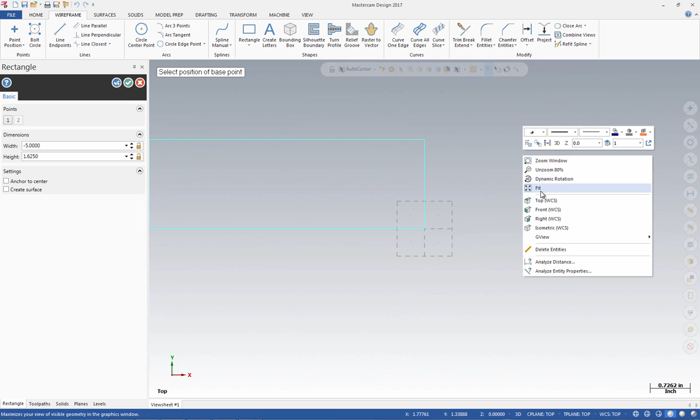Once this is done, come up to the top here and select this drop-down menu beside Auto Cursor and select the origin. Your part should snap to the origin. Also, come to the graphics interface here, right-click, and select Fit. This will fit the geometry to your screen. Once you are happy with this, select OK.

For the next step, we will be creating parallel lines. Come up to the top and select Line Parallel here. Once you have this selected, select this line off to the side and sketch it somewhere on the left-hand side.

Insert the distance 1.375 and hit Enter on your keyboard. Select this button at the top.

Again, select this entity here and sketch it to the left-hand side. Insert a distance of 0.375 and again hit Enter on your keyboard.

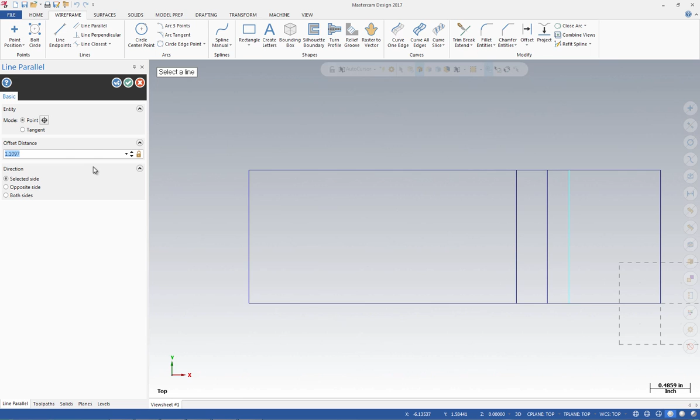Select this entity here and sketch it to the left-hand side. Enter a distance of 3.125 and hit Enter on your keyboard.

Next, select this line here and sketch it to the right. This time, enter a value of 1.25 and hit Enter on your keyboard.

Select this horizontal line down here and sketch above it. Enter a value of 0.625 and hit Enter on your keyboard again.

Select this horizontal line again and sketch north of it and enter the distance 0.875 and hit Enter on your keyboard.

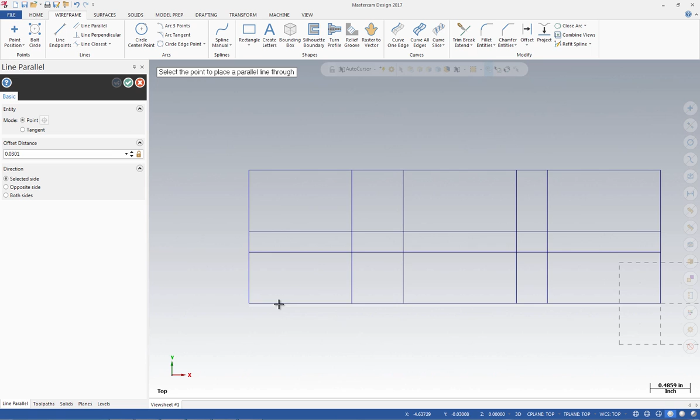Select this horizontal line one last time and select above it, and this time insert the value 1.25 and hit Enter on your keyboard. Once this is done, come up to the top and select the green button, OK.

From here, come up to Wireframe and select Line Endpoints. Select this intersection here and select this intersection here to create that line. Once this is done, come over to the green button again and select it.

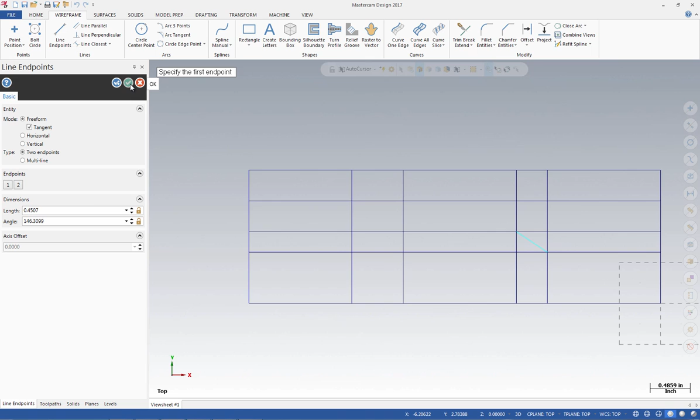Come up to the top and make sure Wireframe is selected. Under the Modify group, select Fillet Entities. The dialog box will appear on the left-hand side. If you have a radius of 0.25, that is the correct amount, just hit Enter on your keyboard.

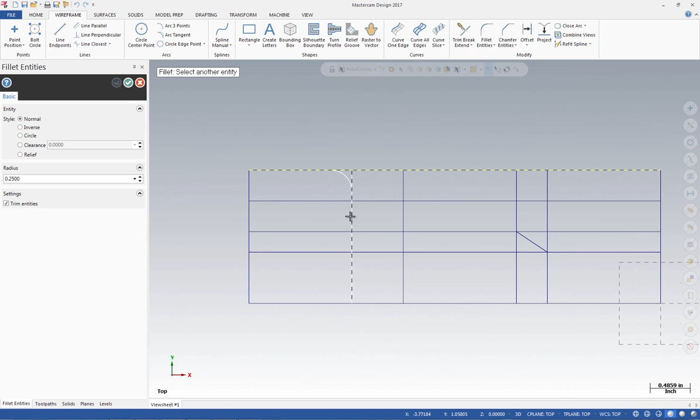Select Entity A to Entity B, following your training tutorial, Entity C to Entity D, again following your training tutorial. Hit Enter to finish.

Come over to the left-hand side, Fillet Entities, and change the radius this time to 0.0625 and hit Enter on your keyboard. Once this is done, we're going to select Entity E to F and select OK when finished. Your part should look like this.

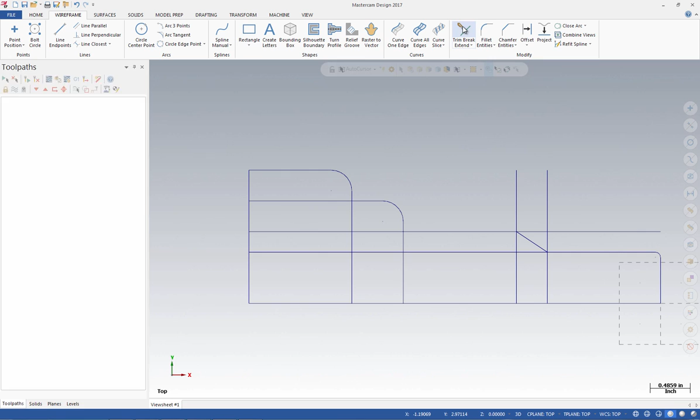Once this is done, come up to the top and make sure Wireframe is selected. Under the Modify group, select Trim Break Extend. In the Trim Break Extend dialog box on the left-hand side, select Trim Two Entities.

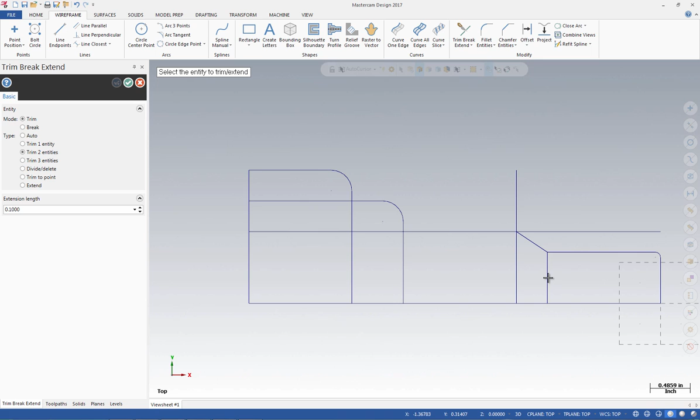Once Trim Two Entities is selected, select this horizontal line to this vertical line. Select this line to this line, and select this line to this line. Your part should look as shown.

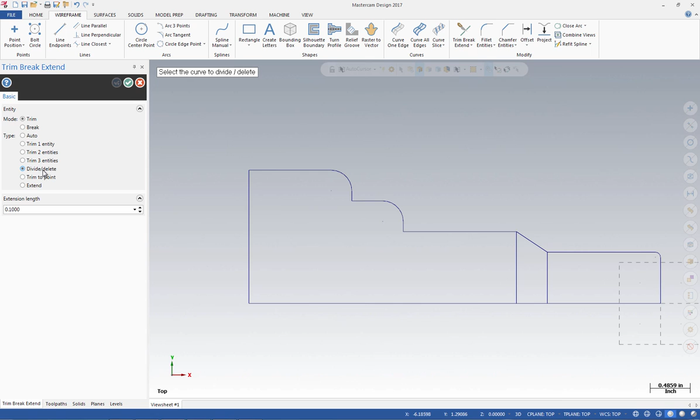We will then select this line to this line as well. Come over to the left-hand side and select Divide/Delete, and select entity A and entity B. Come up to the top here and select OK when done. Your part should look like this.

Come up to the top and select File. Select Save As, and find an appropriate spot to save this. I'm going to name mine Tutorial 1-Lathe and hit the Save button.